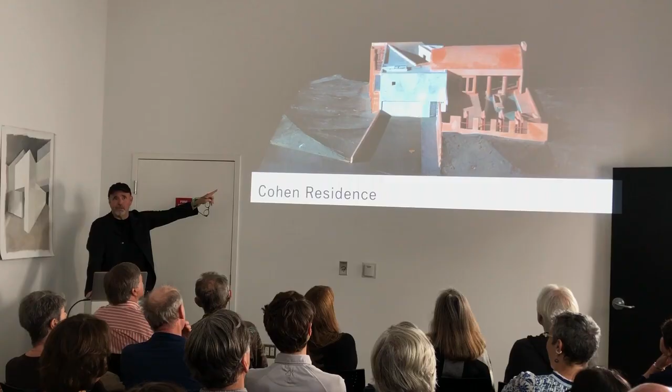So for the next period, I think one of the main reasons - the first thing I did there is I worked on the Cohen residence, which was the project that Joanne Crawford liked. And she told Tom, I want a house like that. Now, I show this because I don't think she got exactly that, if anybody's familiar with this. Although she did get a barrel vault, and we'll see that in a few minutes.

I was brought in to make models, do drawings. Guess how much I was paid? It was great experience, and as I always say, interning is a tough deal, but I really felt like I was the one getting the benefit out of it at the end of the day.

One of the things we did there is we made a lot of models, a lot of fabrications - I'm going to talk more about that later - a lot of artifacts and fabrications. We basically approached architecture from the standpoint that at least we can make the models and drawings, because we never knew if we were going to get a building built at this stage. Literally, there were very few buildings built.

So let's jump into the first house and talk about the Alexander residence. Now, I'm not a historian, and I want to qualify everything I say. It's really from the standpoint of me as a practicing architect who is looking at these projects and how this has an impact on how I'm practicing today. So you're going to have to take some of this from that standpoint, and so there's my qualifier.

Just to get a point of reference, the three projects - Crawford Residence, Alexander House, and what we in the office sometimes call the Woodley Residence - they're actually in vastly different areas of Montecito, but they're close enough that I would say they are part of a community in that they're dealing with similar issues in terms of the context.

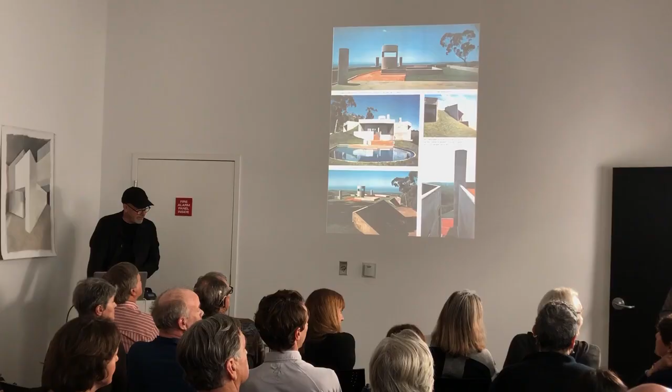This is another page from the article and photographs. I think some were by Jesse and some were taken by the architect. Mainly Roman's photographs, and the aerial is Jesse's. Everything else, oh there, everything else.

The photographs of the interior are very interesting because you get a sense of it being domesticated. I love the quilts on the wall. There's a Paul Tuttle chair in the lower photograph on the left-hand side. You get a sense of the community you were involved with, Nancy, through the arts and design.

And I believe you made those quilts, is that right? No. What are they? I thought you were making quilts. No, they were old quilts. Yeah, okay, quilts.

I was glad to find this Progressive Architecture article, because when you go online to look up information on this house, it's difficult to find good information. Most of the photographs you find are the early Wayne McCall photographs, which I believe are these photographs here, or you find the real estate agent's photographs from when Mr. Martin had the house for sale. The house was much better when Jesse and Nancy owned it and furnished it.

But obviously very poetic, it takes advantage of this amazing site. Fire resistant. I love this photograph, I believe that's the dining room table, right? It's embedded in the house, nobody can take that. That's a photo from today.

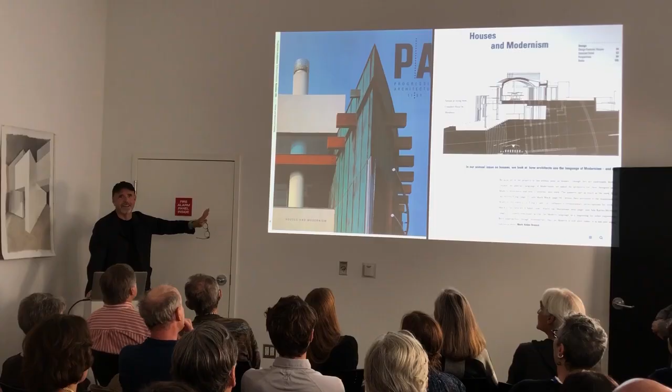Tom says the guest house was mine, because when we designed the guest house, Tom was flying around—he was in Europe, he was everywhere—and I just had to design this thing. He would look at it and kind of pick at it a little bit, but otherwise he had nothing to say about it. And it ended up on the cover, which I always thought was funny.

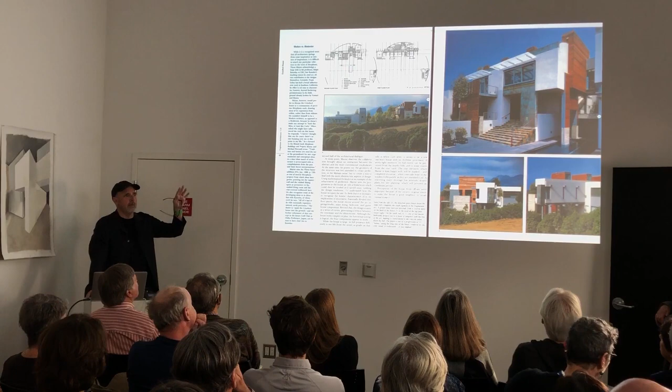Nice, great article. At the time, we had Japanese students that would show up in buses and cameras and climb the fences, giving Bill and Joanne a little bit of heartburn about how many people really wanted to get into the house and see it. Not only this, but there were numerous books, and it was just all over the place. To this day it's been kept up very well by Bill and Joanne, fortunately.

This is, I think, where Susie and Greg live now, right? It's the guest house, which, again, is my favorite. That's a picture of it from the outside. I want to go through this for a minute—that's inside, again my favorite little house. That's the shower. Is it still like that?

If you drive by it from the street today, this is what you'll see, more landscape growing up around it. That's a piece of that building that Bob Easton said should have redwood shingles where that redwood siding is.

These are photographs by Kim Zwarts, a Dutch photographer who came out and is now a very prominent photographer. He did a beautiful series of photographs of the details and the kind of attitude and expression of materials of the house—very much a Southern California notion of materials that are exposed. They'll do what they're going to do over the years: the copper gets a patina, the concrete's going to get stained, the redwood's going to go. That was the attitude—you let it go and let it evolve.

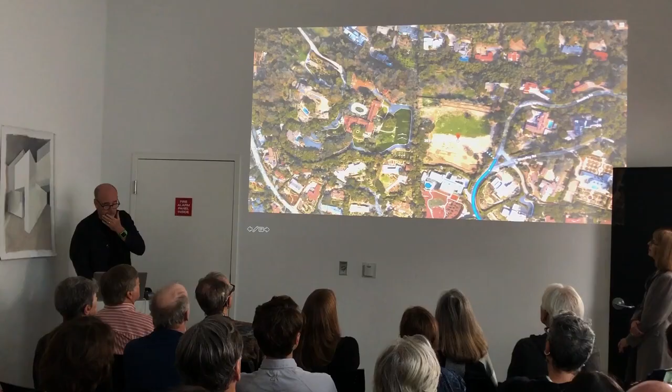Has to do with the hilltop, which you'll see in a second. Aerial photograph. It is adjacent to, most people know this now since it's public, the old Brooks estate here and contiguous to this property. This is a rendering, if you were going to approach the building from the Brooks estate, from the west looking east.

Again, a structure that's buried, but maybe buried in a way that implies a completion of the hill. This is an image that we actually showed the Board of Architectural Review. The intention of this building is eventually when someone would drive by, they'd maybe think it was a hill, except for maybe some curious carve-outs that I'm not even convinced you'll be able to see someday. That's partly, by the way, why the Board of Architectural Review had a similar reaction to this building that they did to the Crawford residence. They basically didn't know what to say.

Except there were some comments, mainly around the landscape and a concern about whether the landscape would really work on the roof, and whether we had really figured that out. Obviously that was the fundamental aspect of the design, and our thesis is that this thing is going to bury into the hill. We had to prove that essentially. Otherwise, not a comment that I took anyway.

There's a little sequence here of renderings just coming into the project. This is what you'll see someday when you're walking on the entry to the project. To the left, that area where you see the car hanging, that's one of Bruce's Isettas, is a gallery space that's adjacent, just off the entry. This is a view as you come through the front door essentially and come into the house.

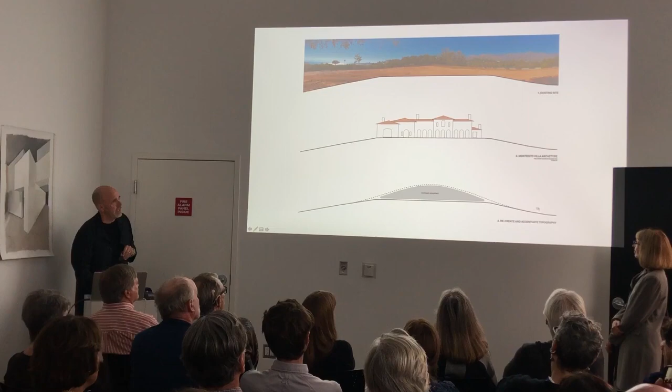This is a diagram that we showed the Montecito Board of Architectural Review, part of our argument for the house. This is what was being planned on this 4-acre site, which was a big, you-know-what. And we came and said, we're actually not even going to go as tall as this - we're going to make this mound. We're going to complete this hilltop that had been just brutally cut off in preparation for this estate that was being planned there, and we're going to complete this hill, essentially.

In fact, we were so interested in that, we have a section that goes all the way down to sea level, and we have a 424-foot radius that completes the house and the ridge at the top. Again, another reference to the geological position on the earth and so on.

These are some of the drawings that we showed the Montecito Board of Architectural Review. These are honest elevations, but it's very difficult to show this house in elevation. This is from the south elevation. The west elevation, this is the elevation that faces the Graholm estate, the old Brooks property. And this is the north elevation that neighbors might see from the ridge on the other side.

Some of the sectional aspects, just to point out, the main living level is basically at this original level where that pad was. And then we've cut down. So when you go out to the site today, the site's actually been cut down to this lower level, and they're building up from that level. Then we're going to push dirt back over the house, and we have a pile of dirt off to the north of the house, if anybody's noticed that.

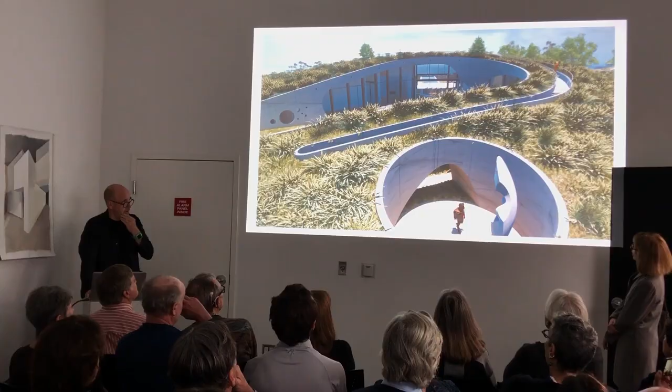This is a rendering that Bruce produced. We have this in a three-dimensional model, and Bruce has brought it into a rendering engine they use for very high-end video games, which has turned out to do a really beautiful job of rendering. And you can fly through it.

Now, back to my sketch. I started doing sketches about this sectional relationship of the house and how this would express itself within the house. We started developing, and we're interested in a series of swoops and moves that would not only support this concrete dome, but would start to define spaces within the house. Those sweeps were generated from a series of sectional cuts around the house.

The computer actually started to make these shapes, you see it on the right there. It had to do with amplitude that related to the sectional aspect of the building. These sweeps started to create different forms throughout the house. As we go through, we'll start to get into some interior views in a second.

Also, there was a certain kind of biomimicry at work. This wasn't our original intention, but we started to notice that there were some other creatures that have figured out ways to design and build like this. This was not our original inspiration, but we've kind of discovered this as we were working and found it interesting.

This is one of the sweeps. If you extract that from the model, that is now inside the house. We did a whole series of prints and models that are throughout our office. If you come to the office tonight after the talk, you'll get a sense of this.

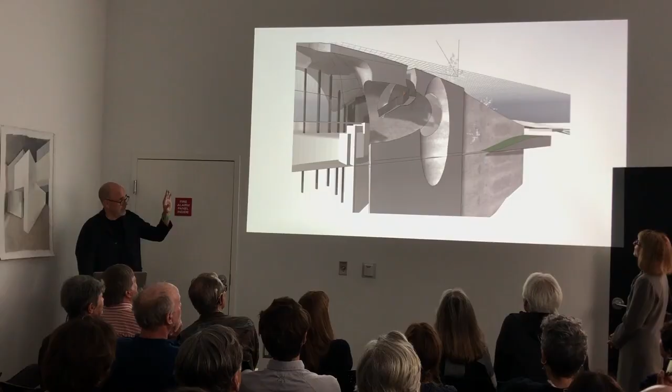A series of different kinds of progress models as we were working through and presenting to Bruce and Linda, coming up with a general strategy for the layout of the house.

Now we're starting to hone in on areas that we call canyon lands. We started getting different names for different areas which exist on the top of the house going down there.

This is, thank you, Bruce. This is a video that Bruce put together. Actually, we'll fly people through the house here. That's that fifth elevation as you come over the top of the house.

Eventually, what we're figuring is that drones are going to start flying around. Bruce has started to do drone views through the house. So these are paths that are like drone paths through the structure and the model that he's doing now as we work. What's really great about these, we're going to go fast, but what's great about them is that we're using them in the design process.

We're identifying places in the design that need work, or are resolved or unresolved. Wow, you went really fast, Bruce. There's a lot of different little spaces to discover.

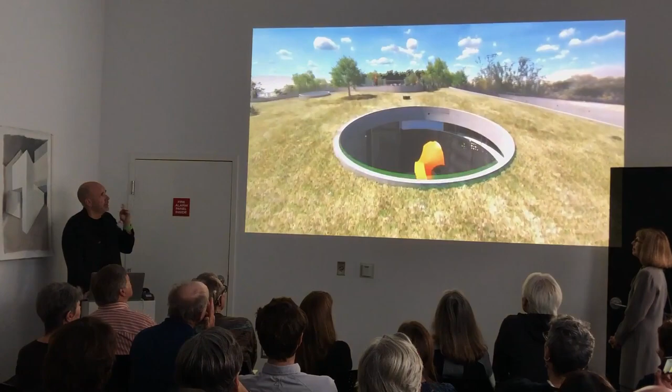Working digitally like this has started to clue us in on later, when the house is built, different paths we might take with drones throughout the house. When we're photographing projects now, we're using drones to actually photograph them. There's Linda in her kitchen.

I think these have been helpful for Bruce and Linda to really understand what they're getting. I can't help but wonder if Nancy or Bill or Joan had a chance to actually experience her house as graphically, carefully rendered as this, what impact that might have had on the design. Because these have definitely had an impact on the design as we've worked through. Bruce and Linda have come with comments that have been very helpful to the development of the structure.

I think this one's where we end. No, we're still going through. There's a whole interest in the house not only from the top, bottom, and sides, but we're thinking of it as a holistic object from all sides, all views, right? We've looked at it upside down, we've looked at it sideways, we've looked at it every way possible. This is the last one.

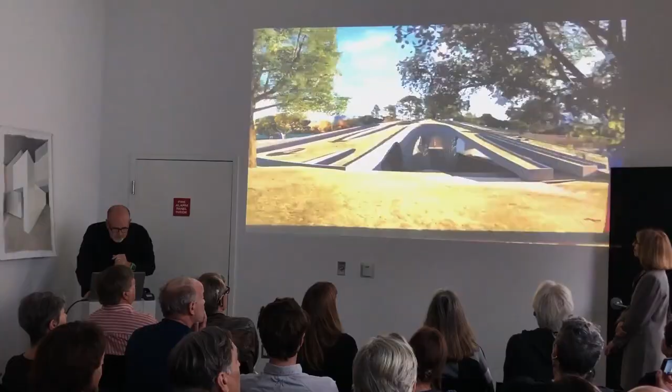Beautiful. Oh, thank you.

The process by which to do this—I'm going to keep moving here because these are images from the interior. We're interested in the back of house, so you see these forms, but we're also interested in what's going on behind those forms. This goes back to the notion of how it's built. It has two sides, a front of house and back of house, kind of a stage and backstage. The backstage is as much of interest to us as the front stage.

We're doing high-def renderings of all the rooms and all the furnishings and so on. This is a piece that Alex Rasmussen worked on—we're looking at doing this aluminum piece that folds up and unveils the barbecue.

Now I want to touch on the fact that you occupy the roof of the house as well, all within the height limit, because we're essentially below the height limit. Figuring out the construction of this house has been interesting.

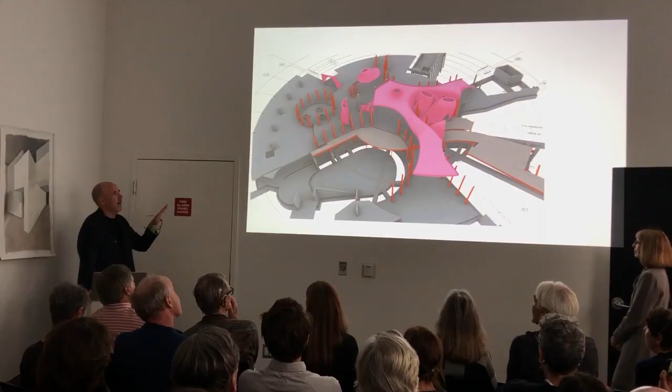We've been working with Gehry Technologies, and every single element of the house is modeled. In fact, the entire concrete shell of the building is a big digital model.

We have actually not been doing any dimensioning of the building that I'm aware of. Greg, am I right about that? It's Gehry Technologies and their model—nobody's out there with a tape measure. They're all out there with GPS units, identifying all the corners and aspects of the house. It kind of freaks me out a little bit.

We have steel going up, and I keep asking, did we check those steel shop drawings? And they're like, no, remember, the structural engineer did the steel shop drawings off the Tekla model, which is completely dialed in to the rest of the model. I'm having a hard time believing it—I'm still out in that trailer with my phone.

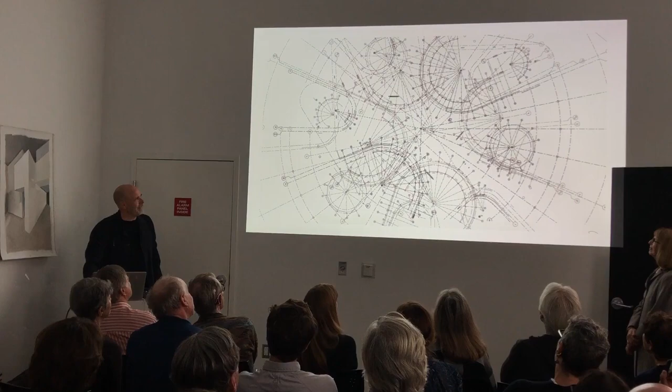Ordering systems—one thing Gehry Technology did with all those forms and shapes you see is resolve the geometries, like how they bend, so they're actually developable with different materials. Fortunately, Gehry Technologies has been very helpful with that.

Now let me talk about Gehry Technologies for a second. That guy, Frank Gehry, you saw on the Domus magazine cover, figured out a company to help him build his buildings, and then that company now helps other architects build their buildings, which I think is a pretty smart thing to do. Then he sold it to somebody for a lot of money, and he's got a big sailboat.

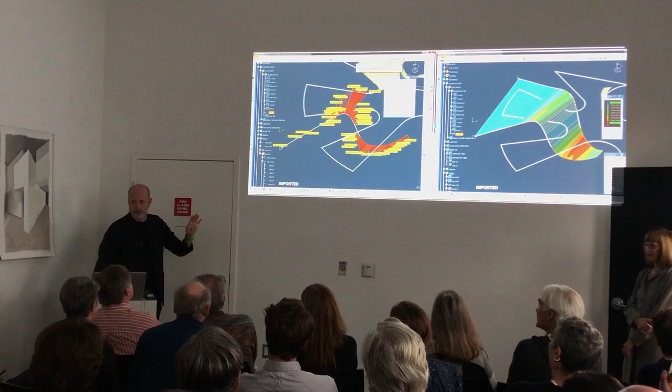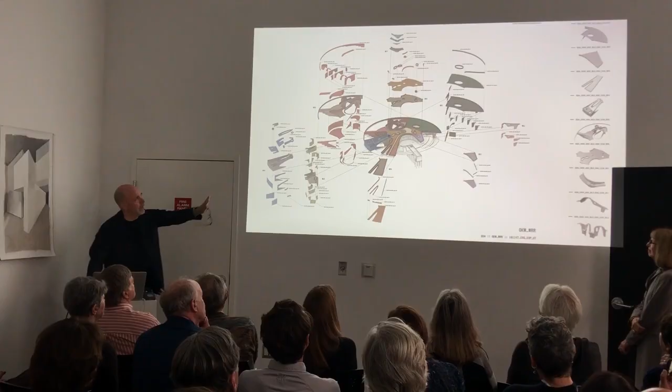Massive structural analysis of the tendons and the structure for holding the building together. This is a little exploded axonometric of how the thing's going to be put together. We've broken down—this is just the concrete—every concrete element and how it's going to be made, who's going to make it, the formwork. Glass as well.

These are models of the model. This is the Tekla model—the engineer has actually drawn every piece of rebar. Every single structural element in the building is modeled ahead of time.

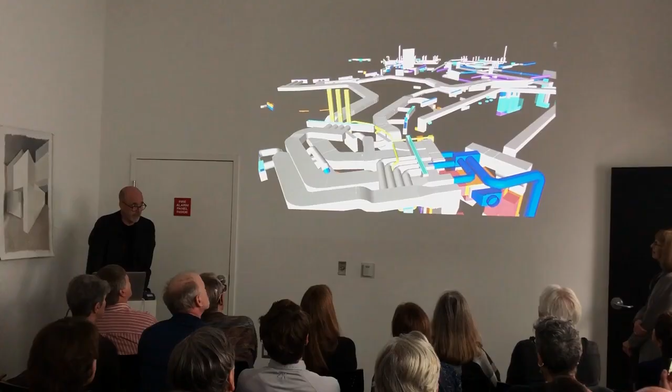This is the mechanical systems, again all modeled ahead of time, with all the clash detection done to make sure one pipe doesn't run into a duct and so on.

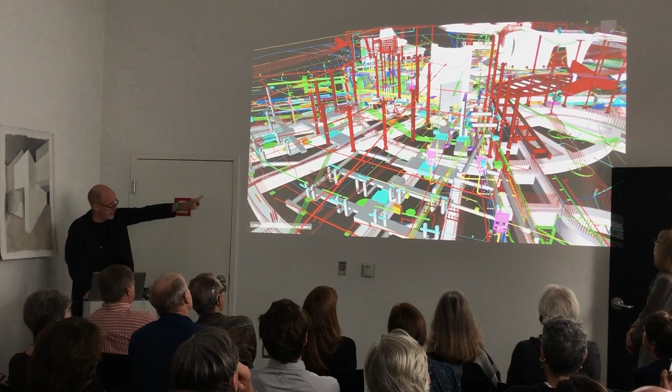This is then coordinated with all the structure, the rebar. It gets more and more dense and populated with all the systems we make with buildings today. You can see where the toilets are going, where all the drains are—every element of the building is modeled prior to construction.

Now, can you imagine when I was doing the Crawford residence? We're going to go back to that for a second. Had we had this—I was the clash detector. I was out there trying to figure out that wait a minute, that beam is going to run into that piece of duct, but I had to stay up all night and do it.

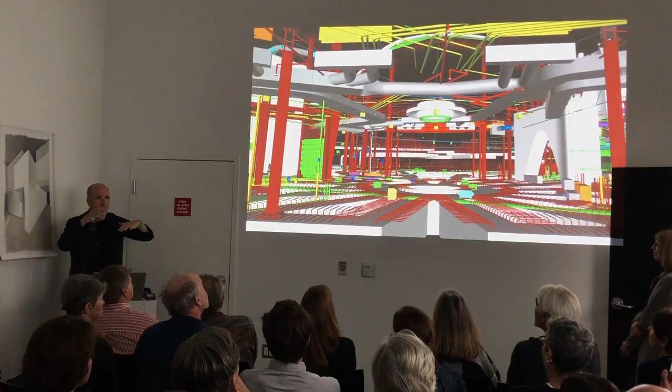Now it all gets designed, modeled, and presumably during construction this will all go together and fit together seamlessly. We're moving pretty fast now, and I'm starting to believe it.

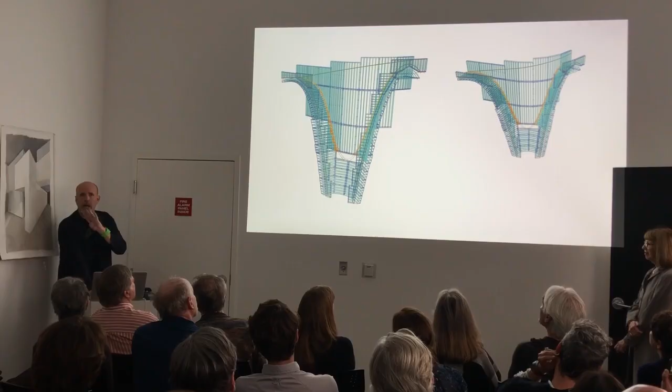A lot of people ask about the concrete, how we're doing it. Every shape and form, every piece of concrete, is modeled three-dimensionally. Most of it's being built in New Hampshire, where they have the ability to actually bend these pieces and cut the billets and do all of those kinds of things.

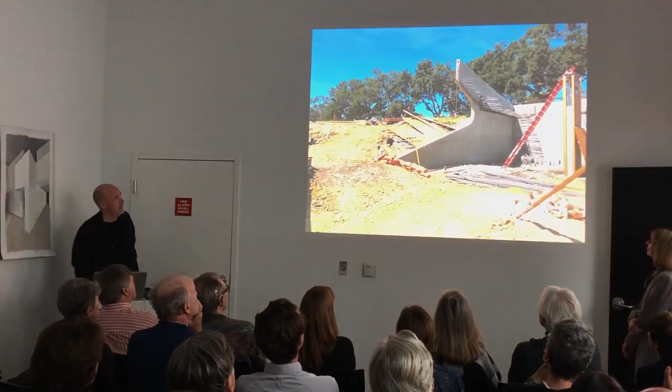We've been joking that Google, or some satellite from Russia or something, is going overhead and seeing this thing and thinking, comrade, there's something going on in Montecito.

Somewhere in Montecito, this is a quick one of construction. By the way, these are movies that Bruce has been putting together, which has been really terrific.

The construction is slated to take about 28 months, which for a building like this is very, very fast given the complexity of construction. Matt Construction is doing it, they built the Broad down in LA and a lot of other significant buildings. Their team, we have a big team of people on this. We have OAC construction meetings, might be 20, 30 people in the room, and all of these systems are being coordinated and built.

This is pretty recent. This area dropping down here, that's the theater. It's in the background, the pile of dirt.

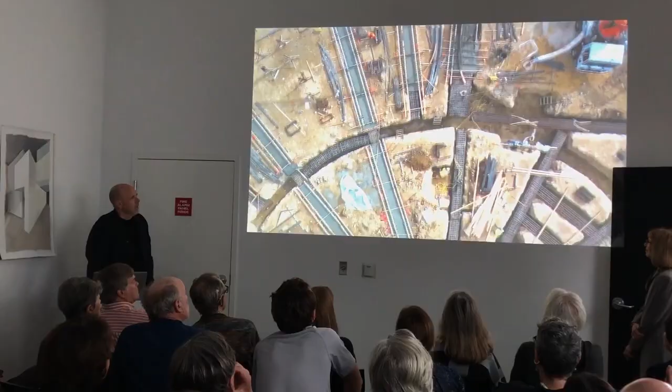And I have to say, the commitment to this, the fact that this is coming into the community, especially given what Montecito's gone through, to go ahead and do this is just a fantastic thing.

Eventually what's going to happen is all these walls are going to start going up, and you're going to have this big concrete shell. And there's going to be a period where people drive by and go, what the heck's going on over there?

But eventually, when the dirt comes in and piles over it and it all gets planted out, it's going to go back. People are going to get what the real intention is. But we're going to go, like a teenager, through a few awkward years before it comes into full bloom.

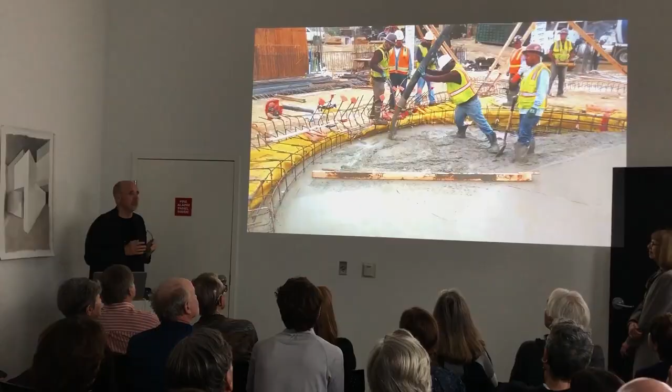And I think really over the years, what will happen is the house is going to evolve and settle into the landscape and just get better and better, much the way Bill and Joanne's house has, and the Alexander residence has. These homes, in my opinion, get better and better with time.

And one of the great things about doing concrete, of course, is that concrete stands the test of time. Otherwise, we wouldn't build freeways out of it.

And now the steel's starting to go up. This is where I got nervous. How do I know that that's the right height?

The ability to do this now, we are now applying this to the major projects that we're doing. We're doing a series of very significant residences, fortunately, and we're doing apartment buildings and so on. But this kind of technology and the ability to visualize everything three-dimensionally, to work out all of the details ahead of time, this is now common to us.

And working on this project has helped us gain more strength within the studio to do that, and eventually will bear fruit in terms of efficiencies in construction and so on.

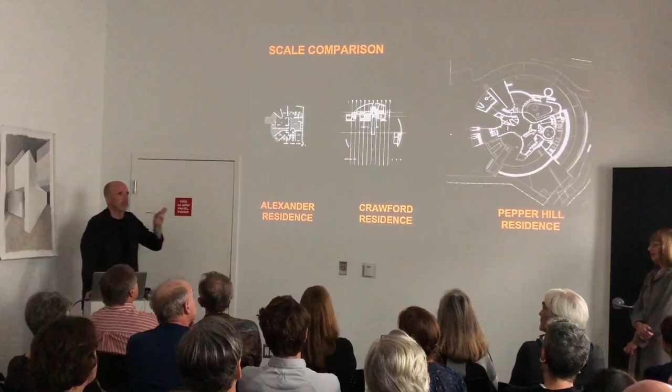So a couple things, I'm just going to finish here by comparing these three houses. I think an interesting one is the scale. These are the scale of the houses, and in general what's happened is that homes have gotten bigger for a whole bunch of reasons. I think any architect in the room will agree with that, and there's lots of stats on this.

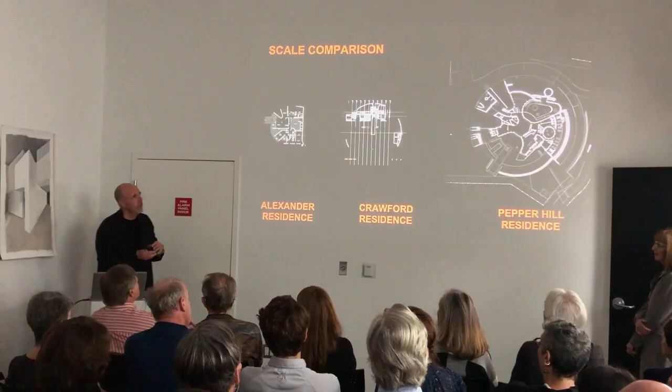But the demands, I think, for how people live and want to live, and have the option of having the gym in their home, their office in their home, a theater in their home - these are lovely options that people are taking on, and it has to do with how people are living and interacting with the community.

I think also this notion of the geometry, the geometry comparisons are interesting in terms of the cardinal points, building the buildings on grids, the circular motif. I didn't start out on a circular motif with Bruce and Linda's house thinking, oh, it was a good idea at Crawford, let's do it here. But somehow I think that was kind of embedded in my brain as we were working through it.

Also, this notion of front yard, backyard - your traditional house has a backyard, has a front yard. All three of these homes disrupt that idea. They're actually surrounded, the notion of being surrounded by territory, and creating your private family area within the territory and being able to define that, has been an important part of each of these houses.

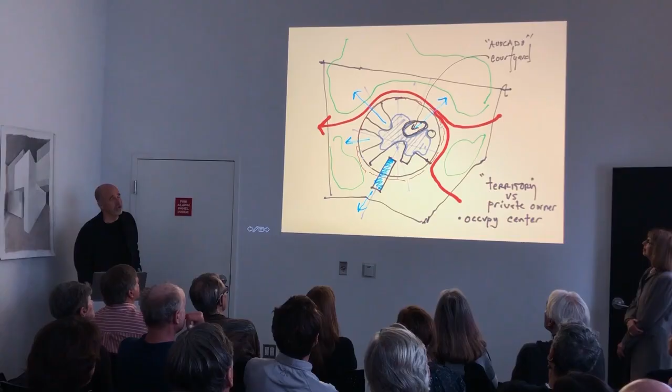I think even with Bruce and Linda's home, there's a similar notion, but in their case we occupy the center, whereas in the Morphosis house we pushed up to the periphery and left the center open. Same with the Alexander residence, which occupied the center.

Interestingly, when I look at the three of them, these are diagrams I did quickly. This motif of the circle kind of lives on, starting with the Alexander residence. But I don't remember Tom ever talking about it as 'they did it up there, so we're going to do a circle.' That isn't where it came from. It came from another kind of mentality around how do we have a dialogue about front, side, back, and so on, and how a structure lives on a site and occupies a site.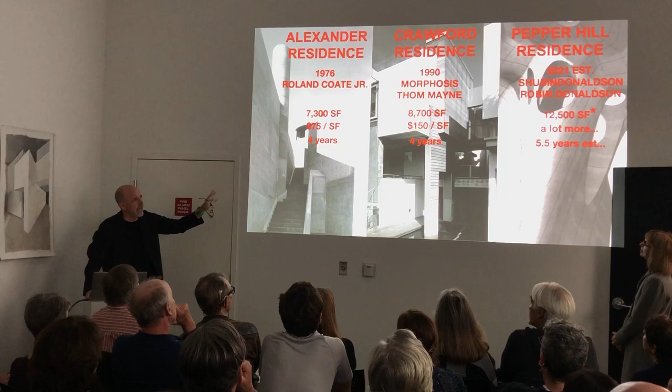Time to build: Alexander residence and Crawford residence, planning and building, about the same. Although I know the Alexander residence ran into a real problem with getting permission to even build on the site, and you guys got stalled there for a while, so it might be more like 4.5 years, something like that, from what I could determine. Bill and Joan's house moved fairly smoothly. Pepper Hill has actually moved pretty smoothly too, it's just going to take longer on the construction side due to the scale of the residence, but it's moving pretty well.

Consultants, this is a funny one. I estimated on the Alexander residence 2, maybe 3 consultants, mainly geology and structural. I'm not even sure about landscape - did you have a landscape architect? Okay, there's 3. Probably an electrical engineer, right? Mechanical, 4 or 5. About the same with the Crawford residence.

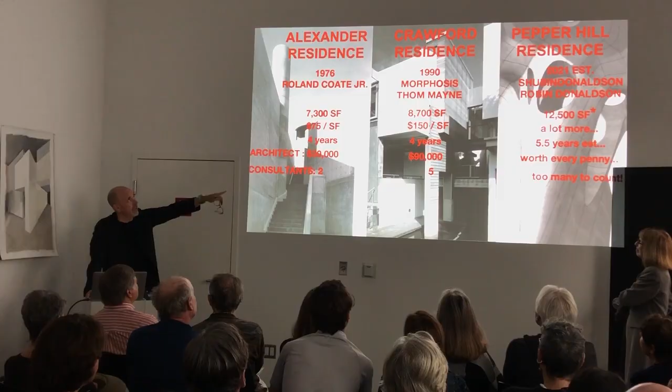Pepper Hill - actually that's not the whole list, yeah we have a typo here. There's actually 21 consultants on the Pepper Hill residence. Again, not unusual, the other residences we're doing are all in that same ballpark. You look at them: civil, media, interior, landscape, theater, kitchen. This is normal, folks, but I find it very interesting because it speaks to what it takes to get buildings done, and societally, what's going on.

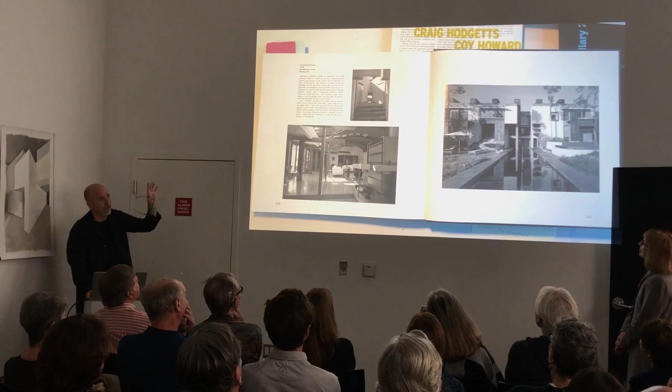So a couple things: Santa Barbara Architecture, everybody know this book? I think it's interesting to go back and look at these books and see what they have to say. Both the Alexander residence and the Crawford residence are in the books.

This guy shows up again, he has something to say about the Crawford residence which I think is pretty funny. He says: the Crawford house, designed by Venice, California firm of Morphosis, 1989. He was wrong on two things - we're not Venice and not 1989. 'Is by intent primarily a theoretical and intellectual artifact.' Thanks a lot.

But he wasn't too far off the mark. This came from Nancy, Alexander residence. He said it was romantic in the best sense of the word. I put that out because this mattered in those times, before David passed away, I think in '96. His opinion mattered, especially up here, and we were interested in what he had to say.

Another book - there's been numerous books about the Crawford residence. This one I find the most beautiful, which has the essay and photographs by Kim Zwarts, a Dutch photographer. But I thought what Thom Mayne wrote here was pretty interesting. He said, I wish to acknowledge Bill and Joan Crawford for entrusting me with the design of their home.

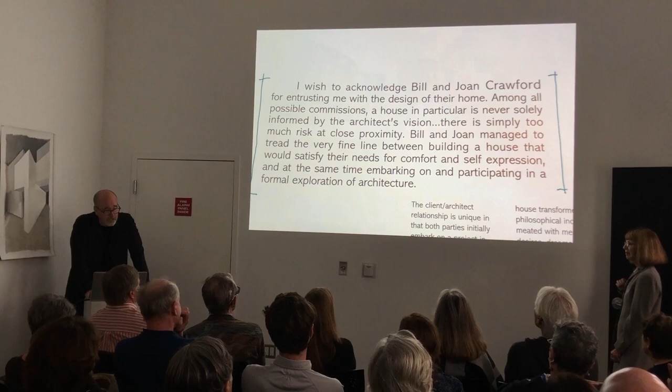Among all possible commissions, a house in particular is never solely informed by the architect's vision. There is simply too much risk at close proximity. Bill and Joan managed to tread the very fine line between building a house that would satisfy their needs for comfort and self-expression, and at the same time embarking on and participating in a formal exploration of architecture. This goes back to my comment about courage, because that's really what's going on here. You're pushing the envelope, and these 3 homes did that.

I'm going to wrap up just for a minute here. I mentioned before about artifacts. One of the things I'm very interested in at this stage of my career is the byproducts of the design process. Obviously drawing and model making is part of this, and also the objects we make as buildings are being built. I think architects need to really pay attention to what they're doing and look at the nature of the process and how we take it a step further.

One of the things I'm doing here, you see on the left, this is a series of lithographs based on the geometries, in this case, from Bruce and Linda's house. Now, one of the reasons I'm bringing this is because I want to see these projected up here large on a screen, so I'm a little bit self-serving. But there's this amazing geometry, and working with the computer, how do we take it out of the digital and start to work with it from an analog standpoint, and actually produce something that might be just as valid as the building it came from - if not, in my case, I find it just as interesting, if not more interesting. I get to own it, possess it, and work with it.